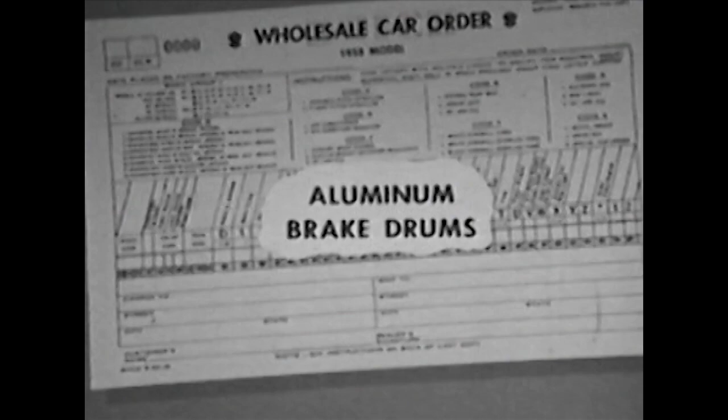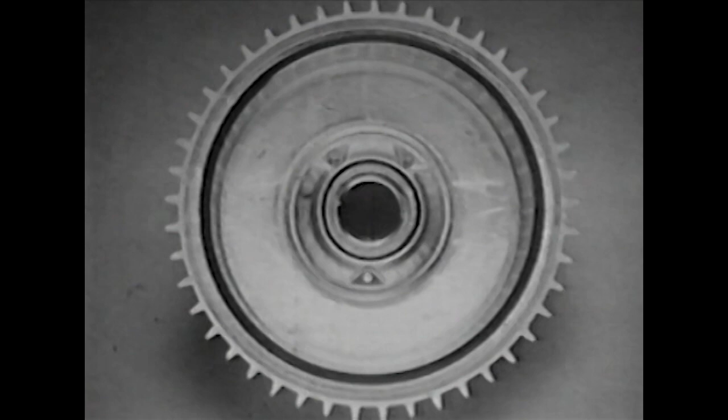There's Buick's new aluminum brake drums, a story of safety to sell your prospects. Heat is the big problem in bringing a fast-moving car to a stop, and as cars get bigger and heavier, heat problems increase. When a 4,000-pound car traveling 60 miles an hour is braked to a stop, enough heat energy is generated in the brakes to run a 21-inch TV set for 8 solid hours. A few panic stops at highway speed make the brake drums so hot they expand, and the stopping power of the brakes temporarily fades. Buick engineers have now broken the brake heat barrier two ways.

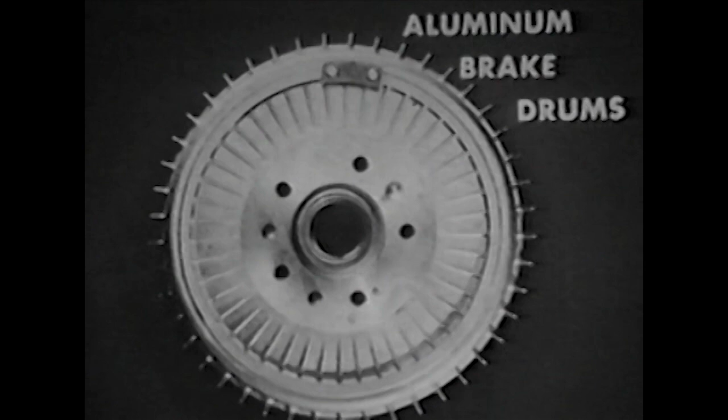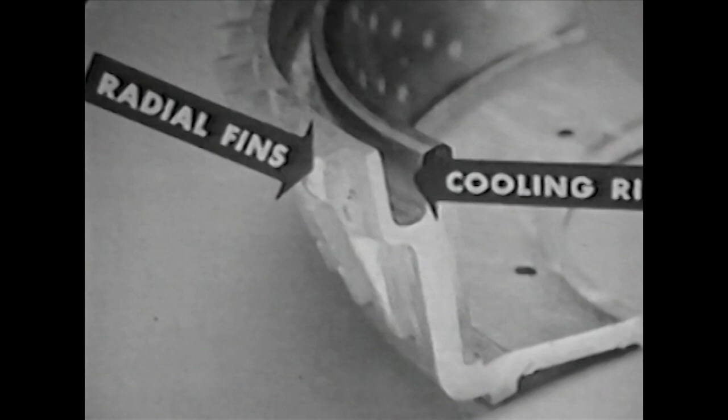First, by using aluminum to dissipate heat 6 times faster than the cast iron used in ordinary brakes. Second, by making the design of the drums different. Radial fins and a unique cooling rib expose more metal surface to the air, greatly speeding up cooling to keep the brakes at consistently lower temperatures for greater safety.

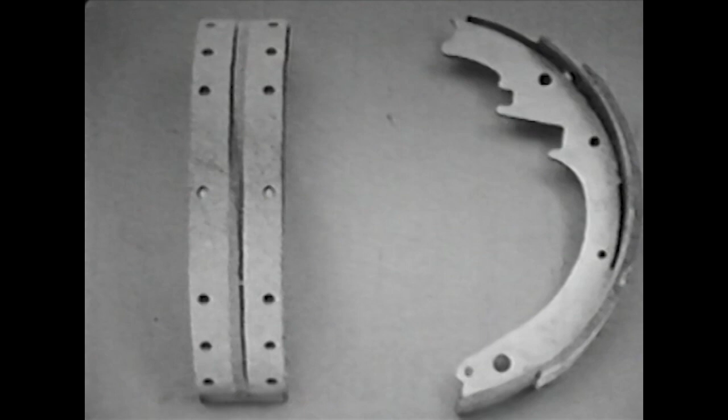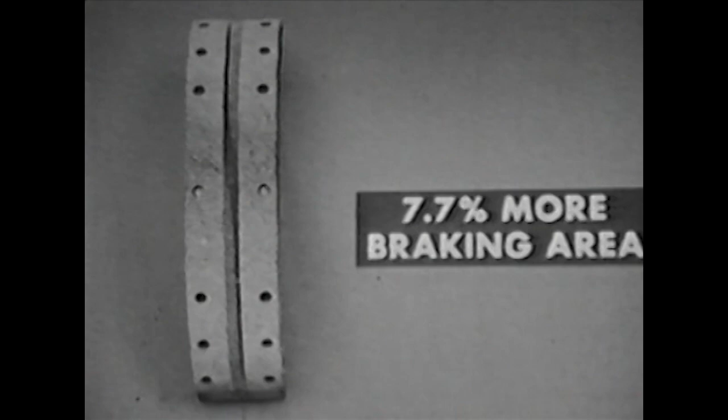Inside the drum, high pearlite cast gray iron liners, especially controlled in manufacturing to resist scoring, provide lifetime dependable braking surfaces. Then, to give Buick the greatest stopping power in its history, even the brake shoes and linings are improved. The brake lining is wider, giving 7.7% more braking area for faster, surer stops, and the linings are almost 50% thicker to give them longer braking life.

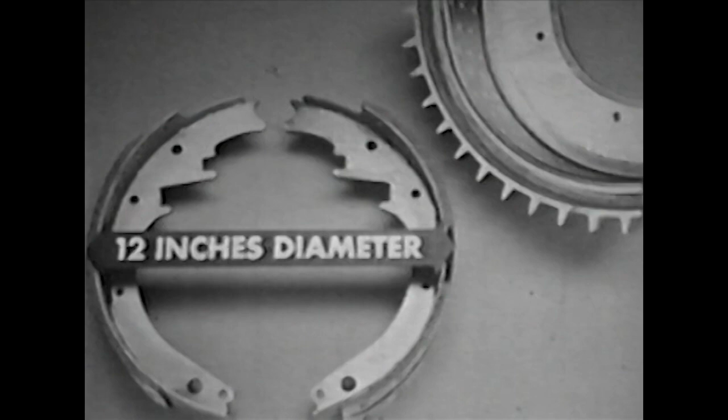These newer, larger linings, plus Buick's big 12-inch brake diameter and the high pearlite liner and aluminum drum, result in braking power that will withstand more than twice as many panic stops and still be ready for more. Standard on Century, Super, Roadmaster 75, and Limited, Buick's new aluminum brake drums and safer, bigger-than-ever brakes are features you can sell. Big brake news on the Special, too.

For 1958, the Series 40 brakes are bigger than ever, a full 2.5 inches wide, the same size as used on the 1957 Roadmaster. When you're telling your prospect about Buick's new brakes, sell him on the Power Assist option.

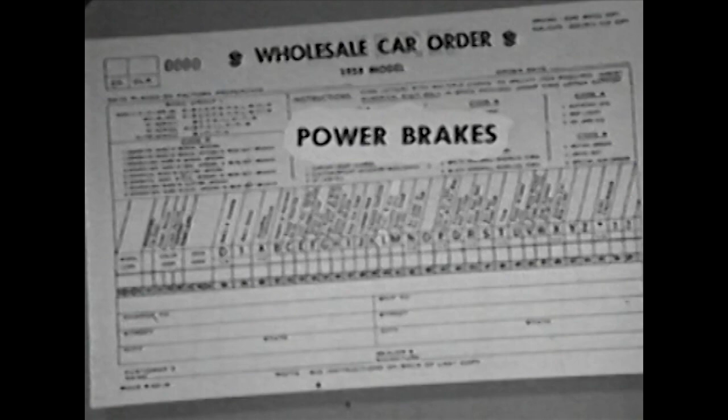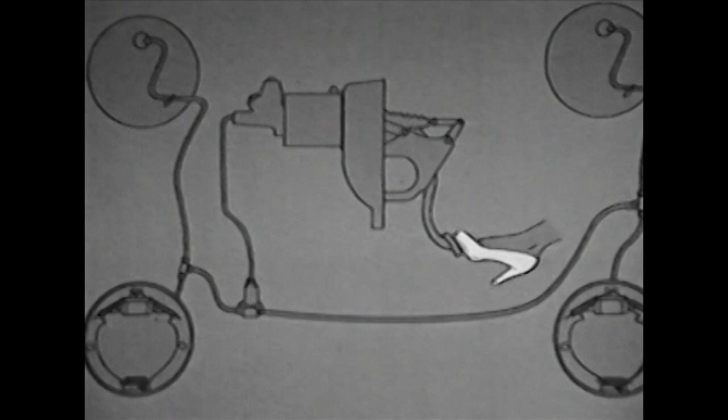Power brakes use the vacuum from the intake manifold to help the driver put extra pressure on the regular hydraulic brake system for safer, surer stopping. Power brakes are more convenient too; the pedal has to travel less, so it's closer to the floor. That makes it easier for the driver to pivot his toe from accelerator to brake, far less tiring in city traffic. Since the Power Assist merely adds extra pedal force, the brakes operate as a conventional brake even if the power were to fail.

Demonstrate Power brakes every time you give a demonstration drive. Make Power brakes another good reason why your prospect should make Buick their byword in '58.

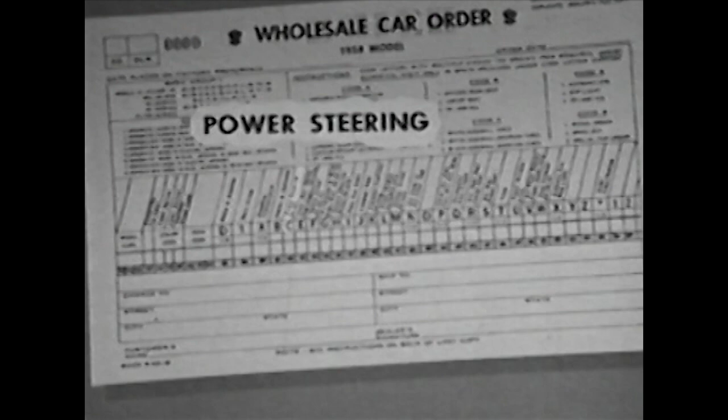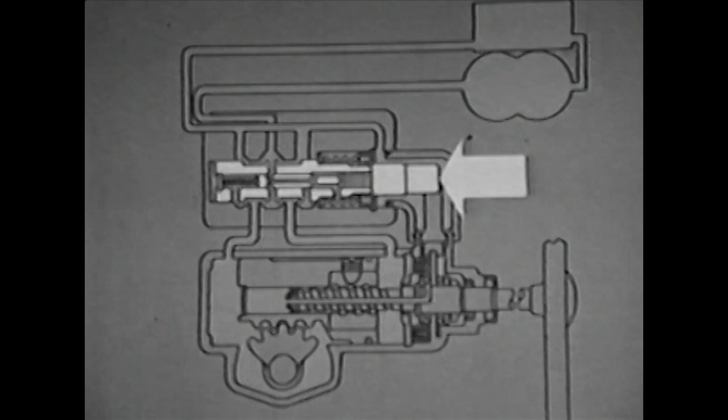Buick's safety power steering is another option that gives the driver a real assist, like another pair of hands on the wheel to do the work of driving. A pump, driven by the engine, provides a constant source of oil under pressure that's held in check by valves. When the driver exerts only 2 3/4 pounds of pressure on the steering wheel, a valve opens, sending oil under pressure to the steering mechanism. The pressure of the oil takes over to turn the wheel for the driver. Buick safety power steering gives the driver full-time control of the car.

When there's no pressure on the steering wheel, as in driving on a straight road, the Power Assist unit is at rest, so the driver has a true feel of the road. It's easier to handle the car, with no fatigue from fighting the wheel. There's nothing new to learn with Buick's safety power steering—the feel of regular steering without any of the work. The wheels automatically return to straight ahead after turning a corner.

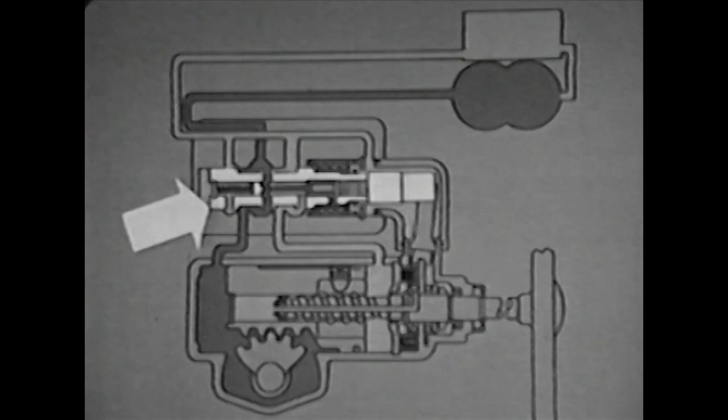A blowout or inadvertently driving off the road onto a soft shoulder merely requires a little finger pressure to keep the car safely under control. And parking is a breeze with Buick power steering. A special valve takes over to give an extra assist for parking. Even a child-sized bride can park effortlessly in the tightest space.

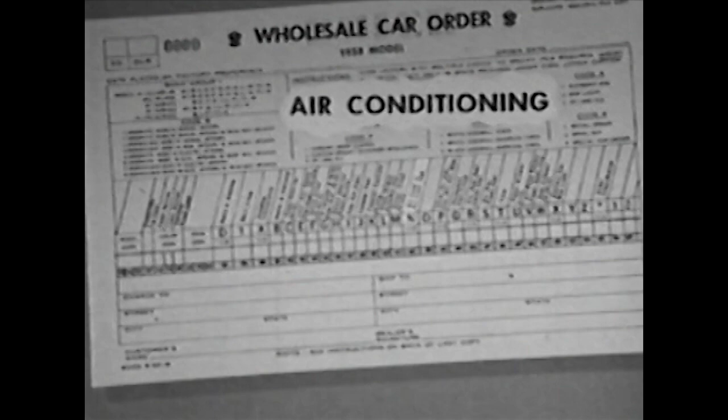Perhaps the most dramatic plus for Buick of all the fine equipment options is Buick's four-season air conditioner. It floods the car with cool, dehumidified air, working with Buick's wintertime perimeter heating and ventilating system, which for '58 includes a radiant-type under-seat heating element.

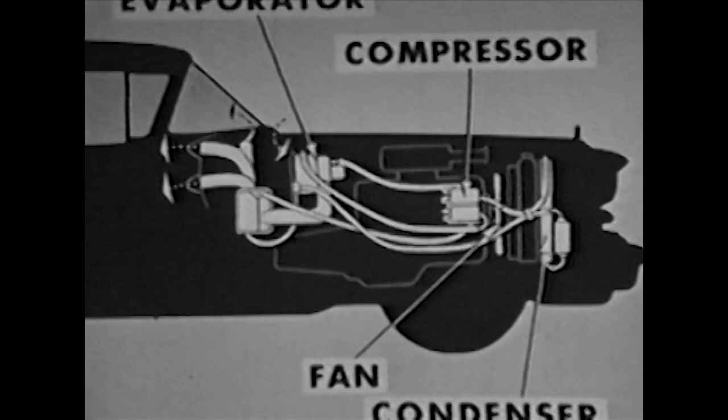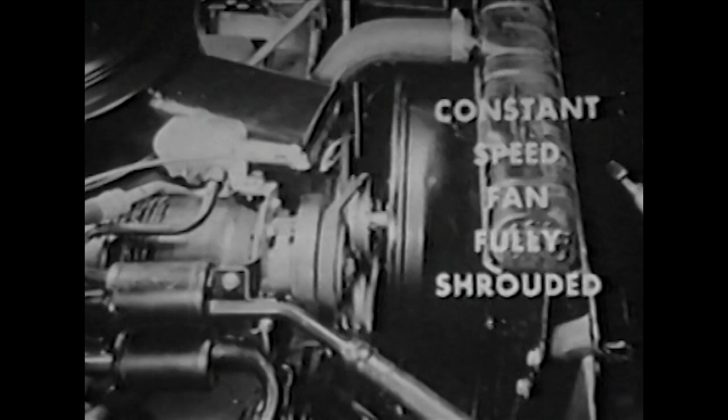For 1958, Buick's four-season air conditioner is better than ever, with improvements that mean cooler air than ever, quicker than ever. Starting at the very front of the car, the condenser has been enlarged by almost 10% to increase the air conditioner's efficiency and reduce the temperature of the air reaching the car's radiator. Then, in a full shroud behind the Dynastar grille that lets in much more air, there's the new larger constant speed fan that drives more air for cooler engine operating temperatures in low-speed city driving, yet reduces noise at higher speeds.

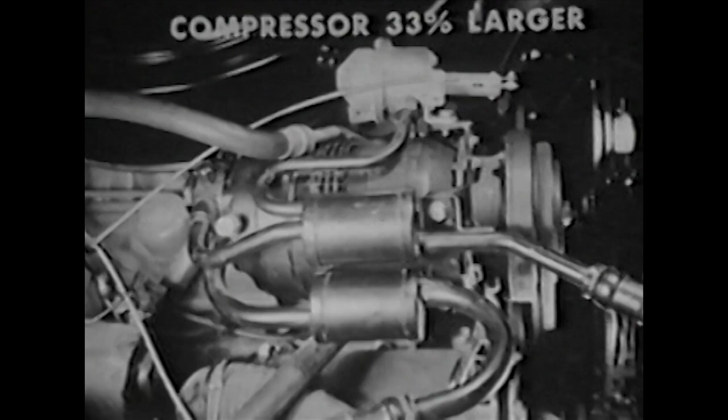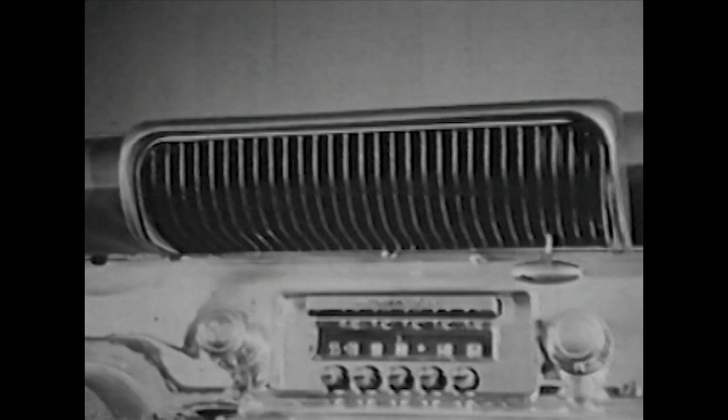The capacity of the compressor has been increased a full 33% for quicker cooling and more cooling, no matter how hot it is outside and regardless of the model you're driving. The center outlet grill has been restyled, and larger hoses have been added to increase the amount of cool air sent into the car. And the outer instrument panel outlets have been enlarged and restyled to admit more air for improved circulation in the car.

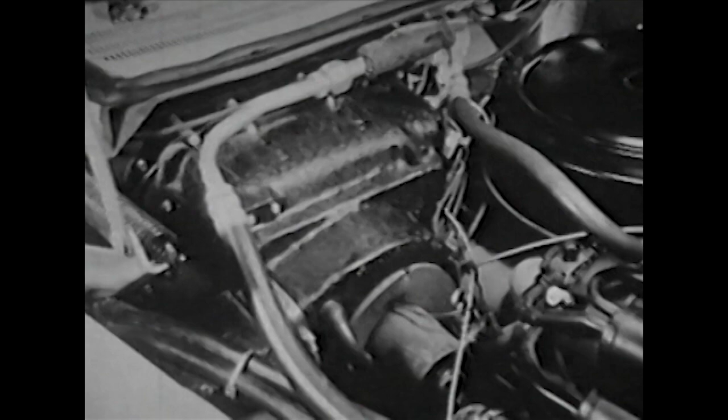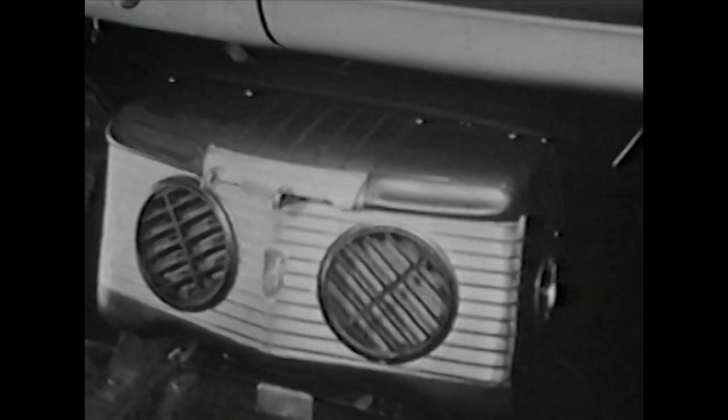The evaporator has been enlarged, too, to cool the increased volume of air handled by the system. And more insulation has been added to the blower duct to prevent loss of cooling before the cooled air reaches the car. The new portable unit has extra big capacity, too, a commission maker for you, since you can sell it to economy-minded prospects who will want to put their unit in their next car. So talk up Buick's improved air conditioning to beef up your commissions.

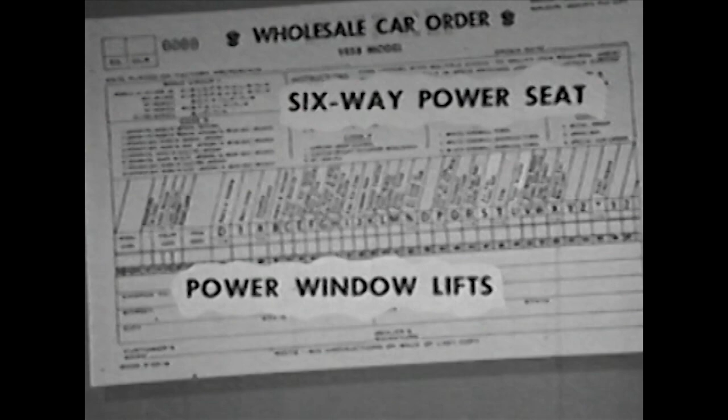Here are two more popular power extras to add to driving pleasure and your paychecks. Buick's six-way power seat adds the ultimate in driver comfort: up and down adjustment, forward and backward tilt adjustment, and the customary forward and back adjustment. It's a natural for the car which is driven by several members of a family. The controls are located in the door armrest in the Limited and Roadmaster 75, and on the seat side panel in the Super, Century, and Special.

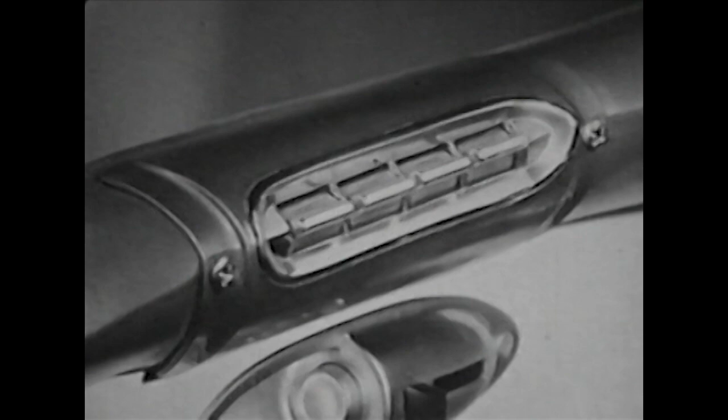When it comes to entertainment while driving, Buick for 58 offers 8 radio, antenna, and extra speaker combinations so that you can suit every prospect's taste and budget.

Buick's new Wonder Bar radio is luxury radio in every sense, with great tonal fidelity. Here's a set that finds the stations for you at a touch of the Wonder Bar on the set or the foot-operated remote control switch located in the floor. The set can quickly be changed to any of 5 preset stations by pushing a button, and it can be tuned manually as well. The Sonomatic radio provides push-button tuning of 5 pre-selected stations and dial tuning.

It also has beautiful tone. 2 antennas are available for either set: an electric-powered antenna for fingertip raising and lowering from inside the car, or the manual antenna that's raised or lowered by hand. And there's the optional speaker for the rear seat of closed models, for the special pleasure of backseat passengers to fill the whole car with concert hall realism.

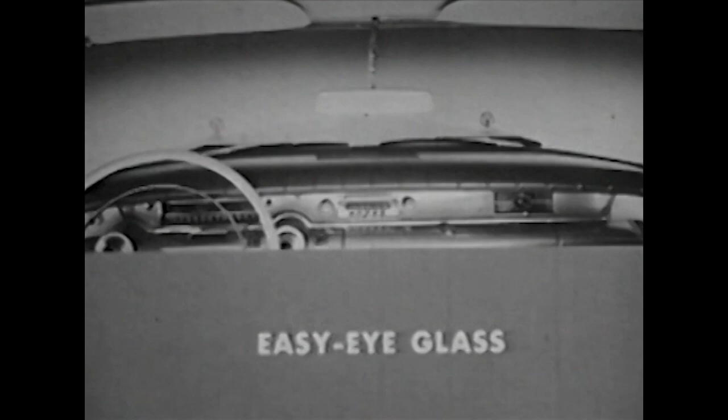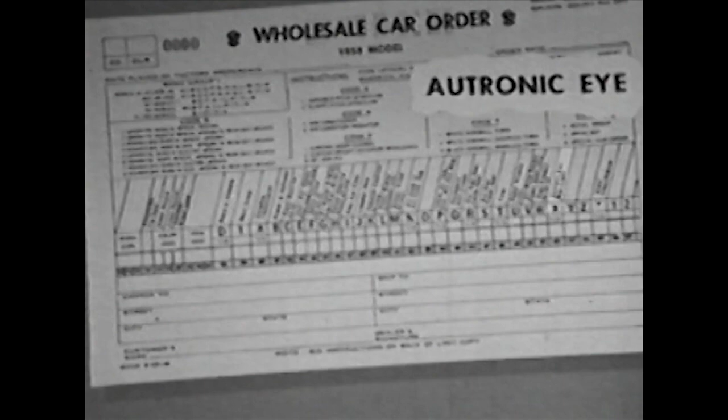Easy Eye safety plate glass is another aid to driving comfort appreciated by every driver. The windshield with Easy Eye glass is darker at the top to reduce glare and eye fatigue, particularly on long drives. The Autronic Eye, available on Buick for the first time this year, is still another Buick extra for convenience and safety. This little unit automatically switches the headlights from high to low beam when meeting another car without thought or action by the driver.

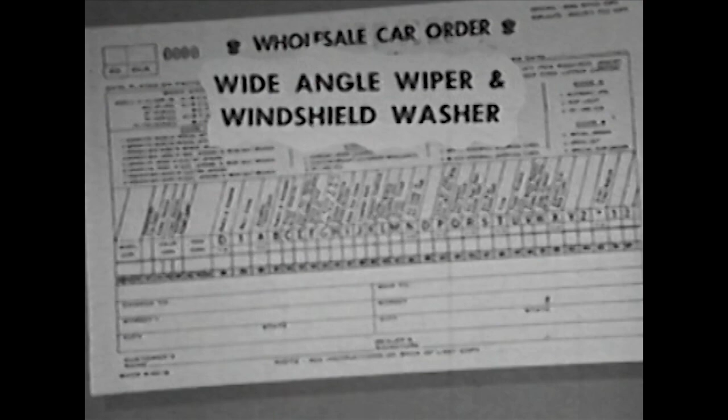For wet weather driving, Buick's new wide-angle wiper blades are a real boon. A full inch longer, and with a wider sweep, they clear a larger area on the big panoramic windshield. For downpour driving, they can instantly be set to clear a narrower area almost twice as fast. And to go with them, the automatic windshield washer. Press the button and presto, a jet of solvent to help the wiper blades clean mud thrown up by passing vehicles or bugs that fly into the windshield. That's real driving safety.

You can almost certainly sell Buick's safety group to every buyer. In this group, all included at one low price, are backup lights, glare-proof mirror, parking brake signal light, instrument panel safety pad lower, and the speedometer safety buzzer. Show them when you demonstrate. Sell them when your prospect's ready to sign.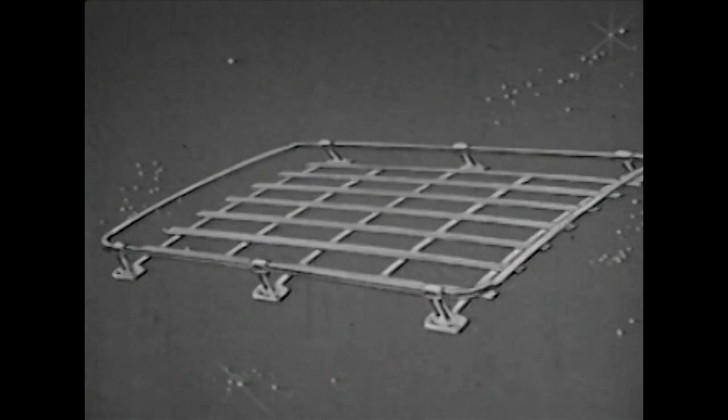And there are extra pluses for Buick's popular estate wagons, too. This divided rear seat gives extra room. Either section or both can be lowered for more carrying space with passenger comfort. And this junior seat increases the passenger capacity, gives the children a seat with a view. Also for the estate wagons, this smart chrome luggage rack for large families, long trips, extra carrying capacity no matter what the reason.

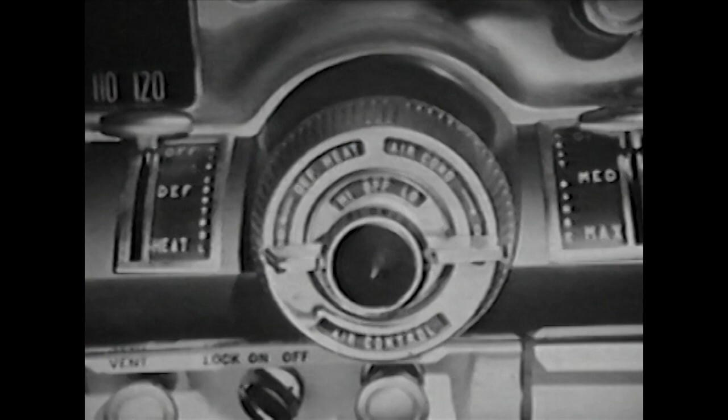Every Buick Extra can mean extra money for you because it makes your prospect's Buick mean more to him. Tell the safety story in Buick's new aluminum brake drums, larger, longer-wearing brakes. Sell your prospects on the safety and driving ease of Buick's power brakes. Show your prospects how Buick's safety power steering makes Buick easier to handle. And treat your prospects to the wonderful world of air conditioning for year-round driving comfort.

Then go down the list of all the other great Buick Extras. Sell them with the car, installed at the factory for years of extra driving pleasure. Remember, pluses for Buick mean pluses for you.